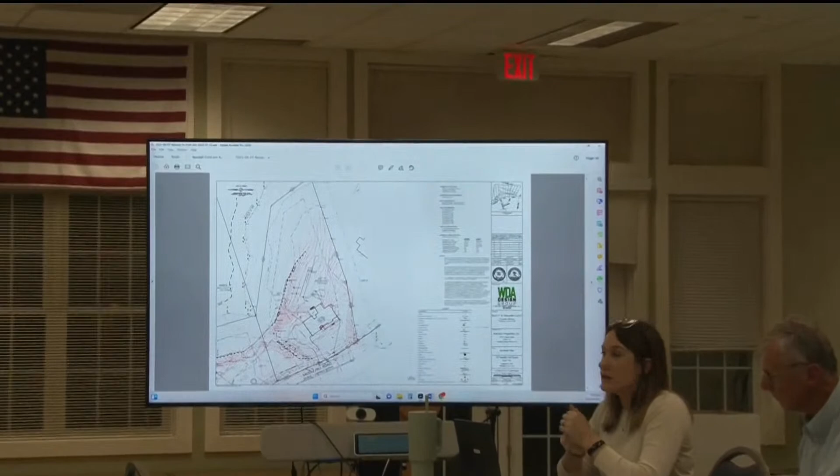So this was an order of conditions for a single-family home. It was constructed in conjunction with the property next door, which was 22 Saddle Hill Road. The COC came before the commission, I think, first last year. Lucas reviewed it and had some comments that we worked through. So the only remaining comment here was this property and the property next door were permitted with natural wildflower meadow areas, and they were actually permitted with those meadow areas occurring in front of the PIB.

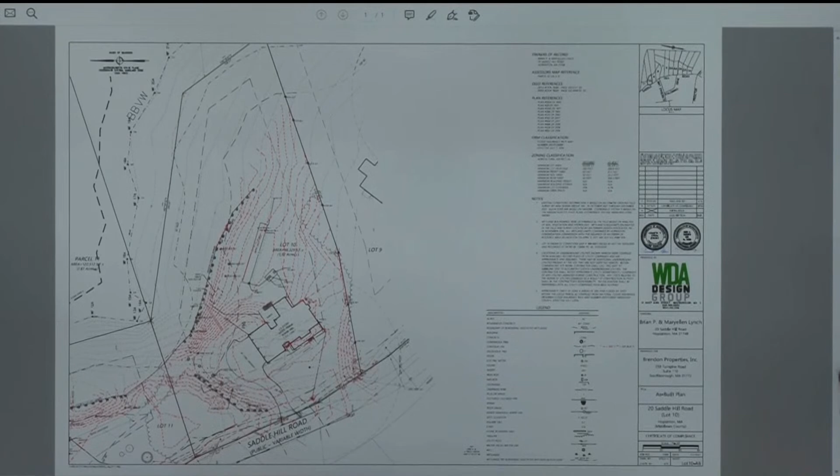The last time that Joe was out there, and then subsequently I was out there in the spring, I didn't feel that the meadow area had been established enough. It looked like perhaps the landowner had mowed at some point. So I went back out last week, I have some photos. The developer also did some plantings as well, some small plantings, some mint and some other wildflowers.

So this is one of the houses we had discussed before, where the wildflower area is shown with a pheno rod. So here's the main wildflower area that we're looking at. You can see it's a little bit more grown in. And here are some of the plantings.

Yep, so it is the best it's ever looked. Is it perfect? No. It does have some plantings, and it's not being actively mowed. Again, as we had discussed on the other property, I think the commission—well, I personally wouldn't recommend to the commission to have the wildflower area in front of the PIBs again. I think there's kind of a lesson learned here, but in terms of compliance for this house, I think that we've reached substantial compliance. And we have had that educational component with the homeowner as well, so hopefully we can get continued compliance.

So your recommendation is to close, or to issue the certificate of compliance, Kim? My recommendation would be to issue the certificate at this point. All right, and then not to use phenol rods going forward on other properties too, right? I would say any area that the commission intends to preserve in any way in perpetuity should be located behind a PIB.

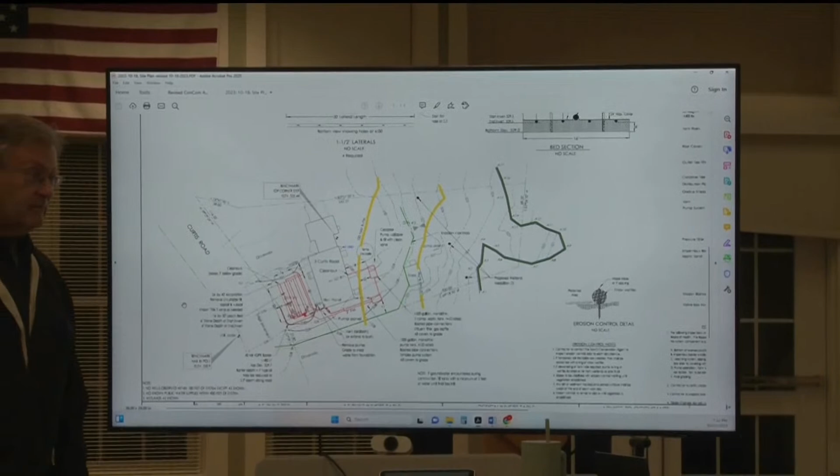Yeah, I can go through those quickly. As was noted, we had looked at the delineation and found it to be appropriate. Had noted there was a discrepancy in the flag numbers - I think that was just a typo.

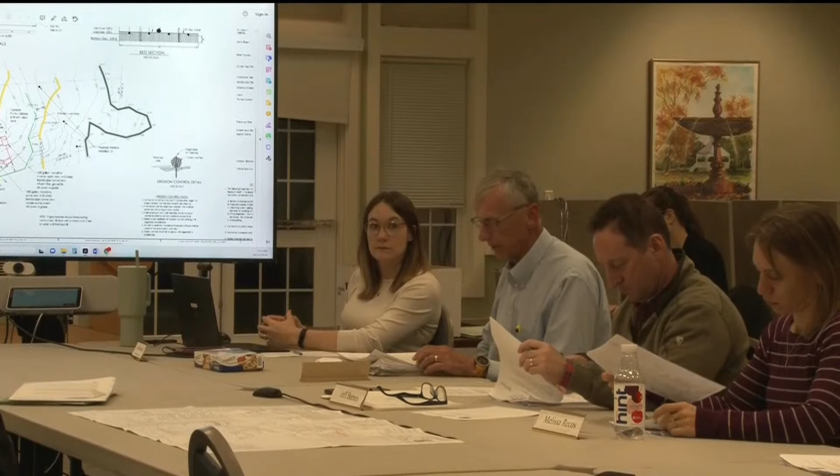There was also an existing drain pipe on the plan labeled as sump drain. We had asked for some additional information on that - apparently that is a drain from a sump in the basement to carry groundwater from the basement.

BVW forms were appropriately filled out. The PIB extra location was noted. We also had a comment recommending some additional erosion control, specific to keeping soil out of the road. The applicant has extended the erosion control barrier along the property line, but would note that maybe something should be done along the road to keep any erosion from coming out into the road.

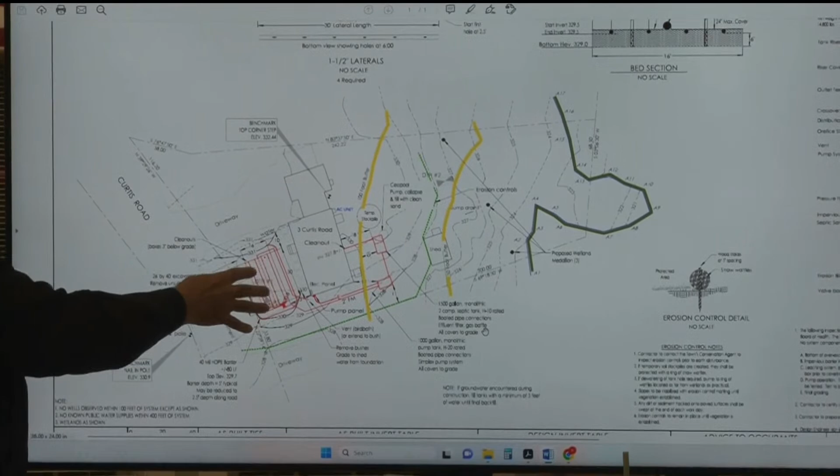Yeah, we did extend it out into the right of way up to the edge of pavement. This is the road pavement, this is access for construction right through here. The topography tends to head down this way, so there's a little room for it to come out this way. During the bulk of construction, this is going to be a big hole anyway, so any sediment is going to go into the hole and not outside. I'm not sure what else we can really do there.

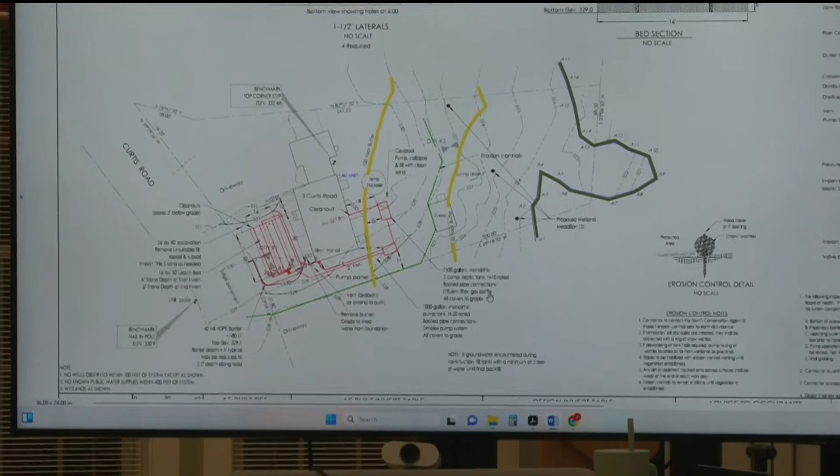We did the one across the street a few months ago and didn't have any issues, if that helps. Is there a catch basin anywhere here? No. There's a drain pipe over here - there's a wetland with a drain pipe coming out of it that runs through a couple of these lots and then out into the street, but we couldn't find any storm drains.

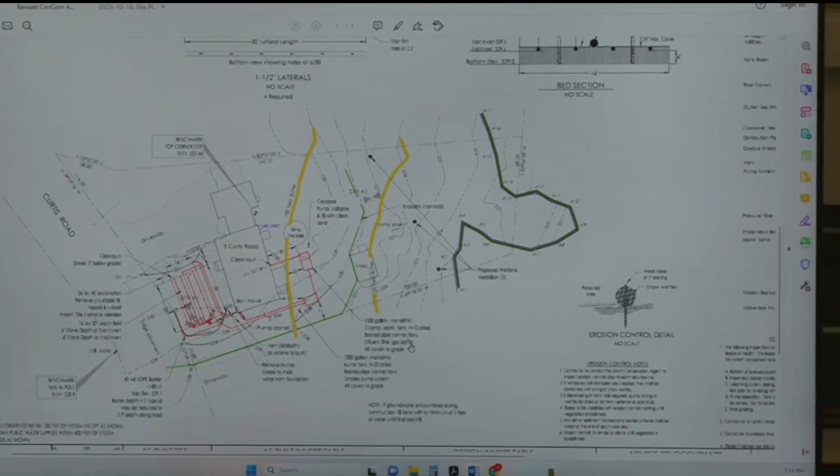Okay, and all the work is on existing, pre-developed, currently developed area, correct? Yes, and we think by moving the system to the front yard, out of the wetland buffer, is a significant improvement. Yep, absolutely. And the shed - it looks like the corner of that is in the buffer zone, but that's lawn area right there? That's all lawn. Okay, yep.

Questions, comments from the commission? I think it's pretty straightforward. Questions, comments from the audience? Okay.

If I can get a motion to close and approve the request for determination of applicability for 3 Curtis Road - so issue a negative determination of applicability. So moved. And a second? Second. All in favor? Aye. Opposed?

Okay, so can I offer you a cookie? I'll take it, through the chair.

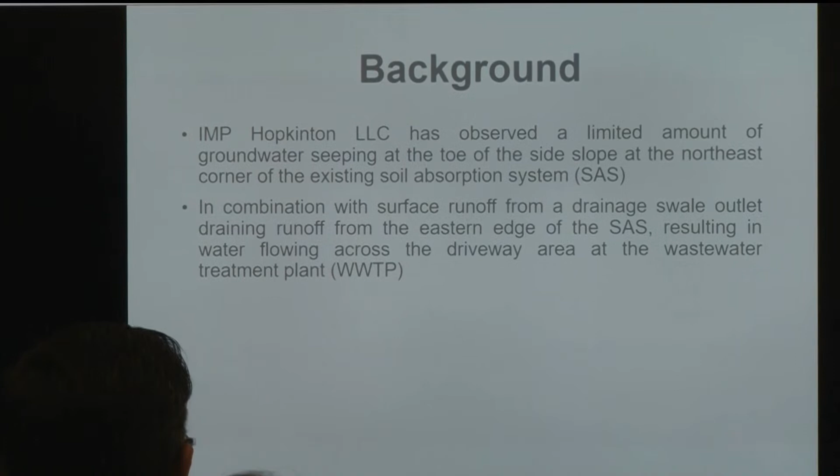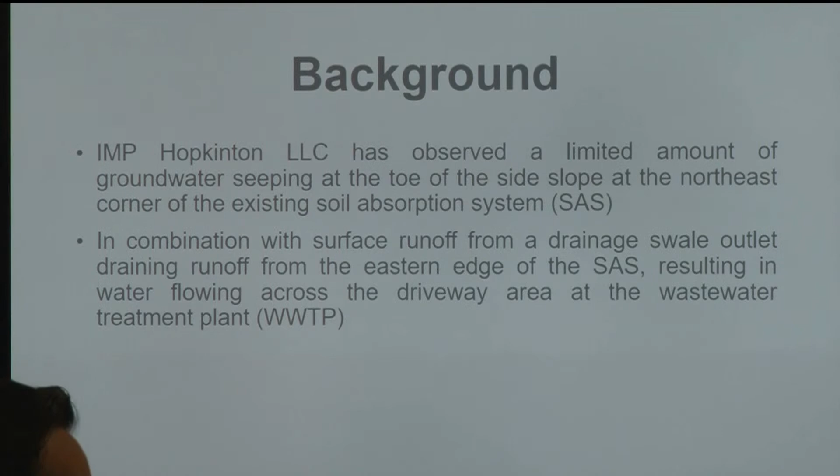Again, my name is Frank Occhipinti. I have with me Jordan and Don - I'm Don, Provencher Engineering. So the background of the project, for the most part, it's an existing wastewater treatment system, and it has a soil absorption system that is currently failing. This project is to basically improve or repair that failing system, which includes adding a geomembrane barrier in order to prevent the breakout of the current system.

We can just go continuing there. So this is essentially the proposed plan in order to install approximately 100 feet of that geomembrane. This plan has been reviewed and approved by Mass DEP, and all of the work is outside of the resource areas, yet inside the buffer areas.

We did look at the review comments from Lucas, and some of the key items was extending the erosion control up at the upper right corner, so that's not a problem - we can extend that in order to prevent any runoff from the driveway, I think was one of the main concerns. The other one of substantial concern was just providing a checklist submittal and the updated wetland flag, which I think we provided to you earlier today, so those have been provided.

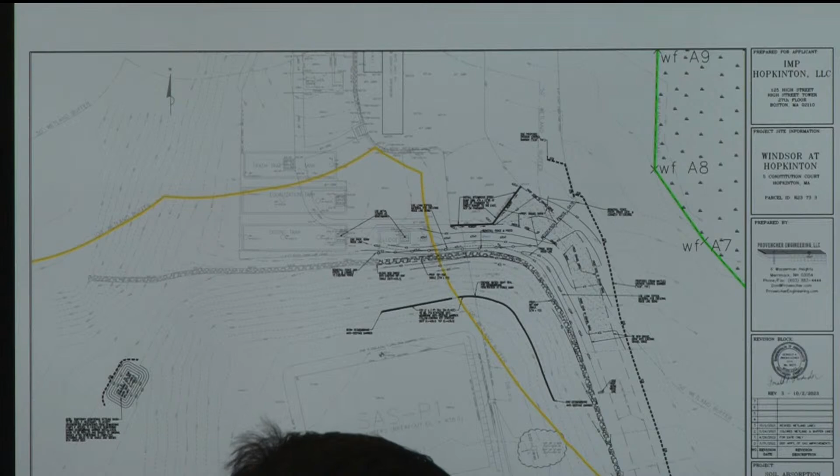And then lastly, I think the only other comment was, again, I think it references back to the... I guess the question was, does it actually qualify as a minor project exemption? Joe, you can elaborate on that?

Yeah, it would. Essentially, while the work is proposed in the previously developed area, it's technically not quote-unquote lawn, but it is developed. So as written in the bylaw regulations, the exemption is for work in an existing lawn. So that was something for the commission to discuss based on...

Yeah, my sense is, in talking with Kim, that it shouldn't qualify for that reason. It sets a precedent, but I don't think that's going to have any material implications related to the project. I think it can still get approved as an RDA, but I'll open it up to the other commission members for comments, questions.

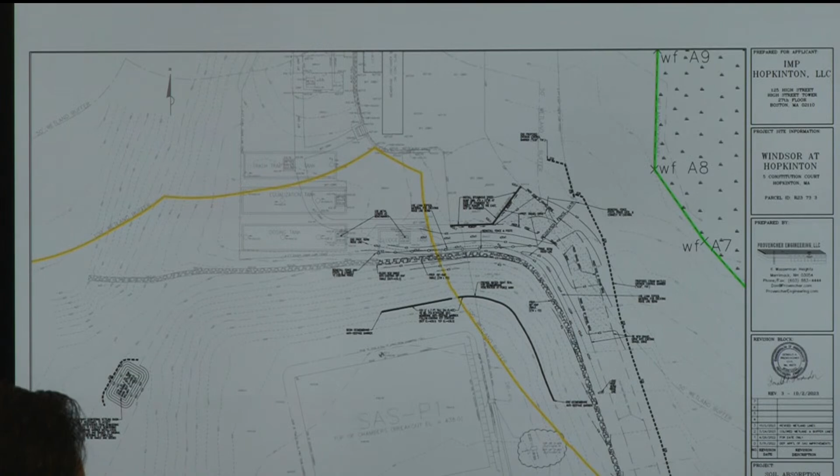I would just add that typically when I issue exemptions administratively, the work scope is limited to a deck, an above-ground pool, a shed. So that's why I recommended the RDA in this case, because the work is about 500 square feet within the 50, and the scope of the work involves excavation. So that was kind of my reasoning.

What was the cause of the failure? It's only been in the ground for a couple of years, right? Yeah, so when this was permitted with the DEP, probably 5 years ago, I can't remember exactly, but there are 6 leach fields there. It shows like SAS-P1. There are 5 more of that same size going down the page. Right, in the back of the property, right? Right. Yeah. All the development is up front to the north.

One of the comments DEP wanted us to address was that there are reserve areas between the primary areas, the actual leach fields. I had submitted the plan with just excavating out the primary areas and leaving the reserve areas intact. They wanted us to excavate out all of the reserve areas and primary areas. So what we did is we basically removed all of the low conductivity, glacial till soils.

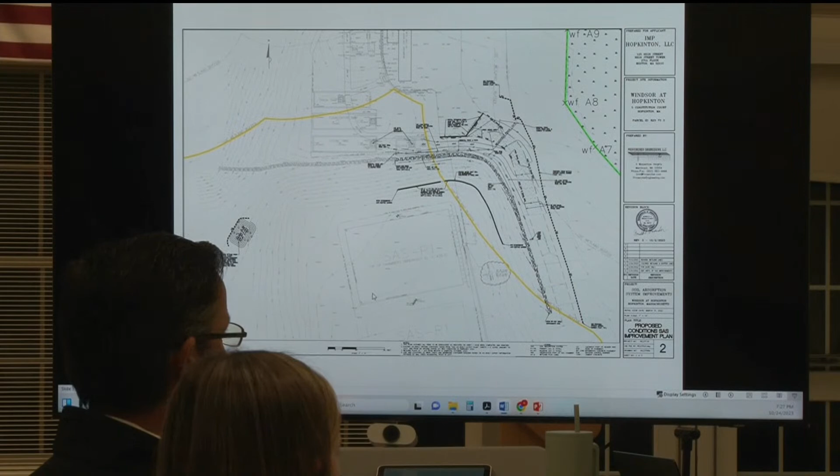Okay, so do you think the volume of the wastewater coming off the development is exacerbating the problem too, or do you think it was?

No, I mean, it was designed for around 50,000 gallons a day, and I don't believe they're approaching that limit. So it's not that they're generating more wastewater than they should be—they're within the design flow. There had been some spikes in the past, but from what I understand, there was a faulty flow meter that was misreading the amount of wastewater being generated here, and that meter's been replaced. Since that new meter went in, the numbers are a little more reasonable, so I think they're below that 80% threshold that DEP looks at for these groundwater discharge permits. If you start approaching 80% of your design flow, that's usually more than what's normal, and that's why they started asking us about it.

And I think it was found that it was a flow meter that was faulty, reporting that faulty information.

Kim, did you have any other questions? Joe? Commission members? Yeah, I have two questions, I guess.

The first is, how did you determine the limit of the barrier? It stops abruptly on that 437 contour, just at that corner. And the second part, in the discussions with DEP about this approval, you mentioned all the systems tie down to this location, and they asked you originally to put septic sand in the reserve areas as well, kind of creating one large system. Was there any discussion about putting a membrane between the systems to stop all the flow getting to this point? There was some discussion of that.

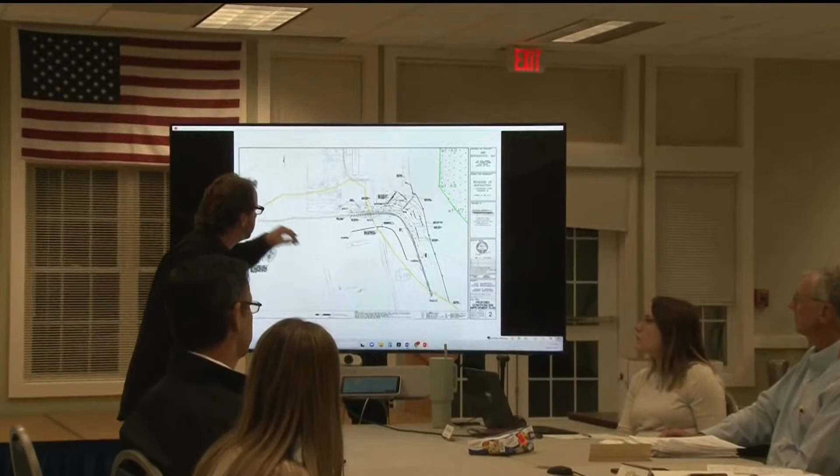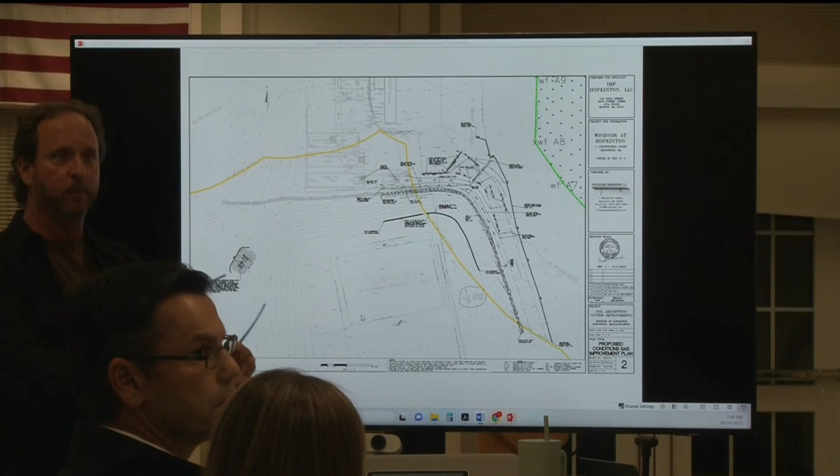The extent of the weeping is very small. It was literally where one of the lawnmowers that mow this area occasionally had made a rut, and it just started coming out of that one tire rut. So it's not along the whole slope, it's really limited to essentially one spot, and that was down at a lower elevation.

So looking at this elevation of 437, if you go 7 feet deep like we're proposing, the bottom would be at 430, which would be below the elevation of where the weeping was observed. So we're kind of cutting it off that way.

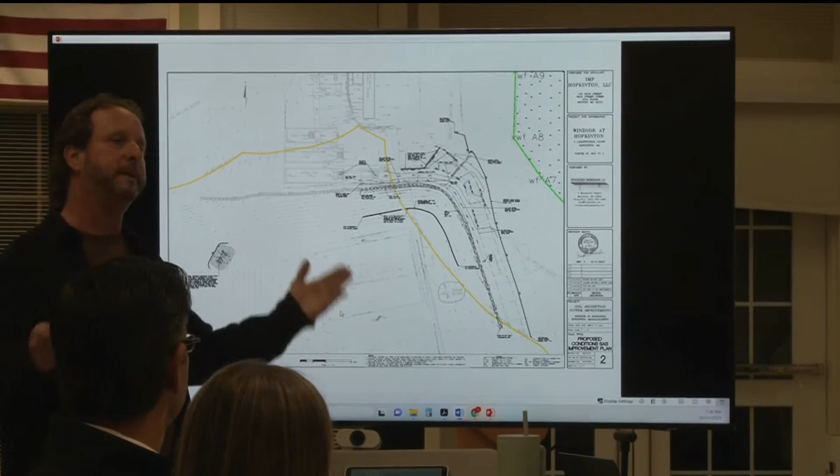The other thing is, if you know anything about leach fields, there's always a 5-foot over dig, so the Title V sand runs 5 feet beyond the limit of the leach field. I wanted to make sure we got it far enough out to be in the berm, because when this was all created there was ordinary fill on the site, low conductivity, mixed with subsoil, also very low conductivity. There was a dike built to contain all the Title V sand. I wanted to make sure we weren't excavating in the Title V sand, because we'd be dewatering that forever since it's so conductive. So we pushed it out further so the membrane would be installed in that low conductivity soil, where there shouldn't be as much seepage, since it's not like Title V sand.

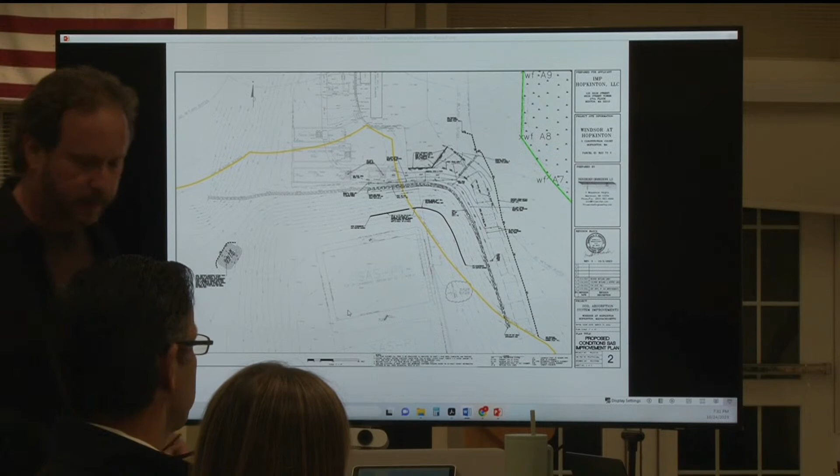Did I answer your second question? About DEP, the discussions with DEP, and whether there was putting a barrier between the systems to stop flow from getting to this location — we did discuss that. DEP didn't like that idea. They said if this didn't work, they like this idea better because you're focusing the fix where the problem is, and it's not posing any other problem besides that little area that's weeping out. They thought this would be the appropriate fix, and if it didn't work, they'd probably look at doing something else like that in the future. But at this point, we're confident, and they're confident, that this should handle the solution.

Yeah, the reason I asked is you've got that corner where the weeping occurs today. You put the barrier in — are there concerns that the weeping will just shift to the other side of the system, at the same elevation, coming out towards the wetland to the west?

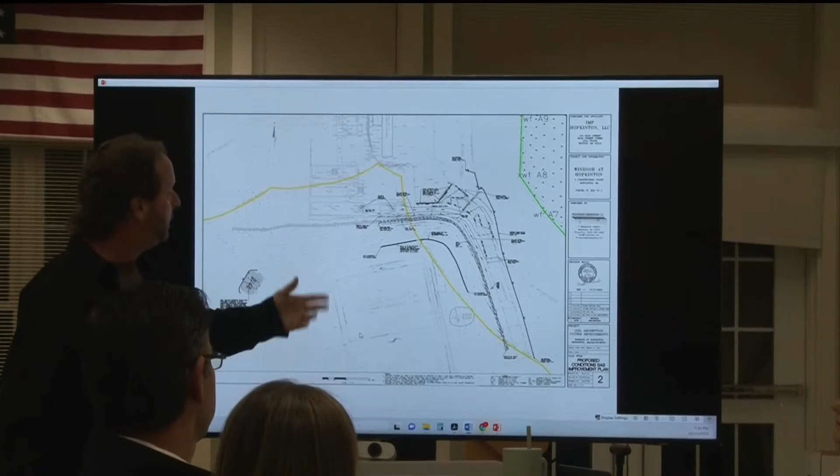Yeah, I don't think we're anticipating that. If we had to come back and do some other interim barrier, we will. I think what you're looking at here is that, other than this little segment, we would be outside of the buffer zone. If we had to come back and do something, if it weeped out here we could extend it here. This is a reserve area. If we did a barrier here, I'm not promising, but I would think it would pretty much be outside the buffer zone for any other fixes we're doing. And if it was in the buffer zone, we'd be right back here, obviously. But we're hoping that's not the case.

It was a very minor weep. I mean, they're putting out 35,000 gallons a day. If I had to guess how much seepage was coming out of that corner daily, if it's a couple hundred gallons I'd be surprised — I don't even think it's that, I think you're less than 100, even 50 gallons. It was literally just a very small weep of water coming through there. It was almost imperceptible, except for the fact that we went through several weeks — this wasn't this summer, obviously the summer before — of completely dry weather with no rain, and there was still some seepage coming out, so it became evident that it's effluent, not just runoff.

Okay, thank you. Any other questions from commission members? Questions from the audience?

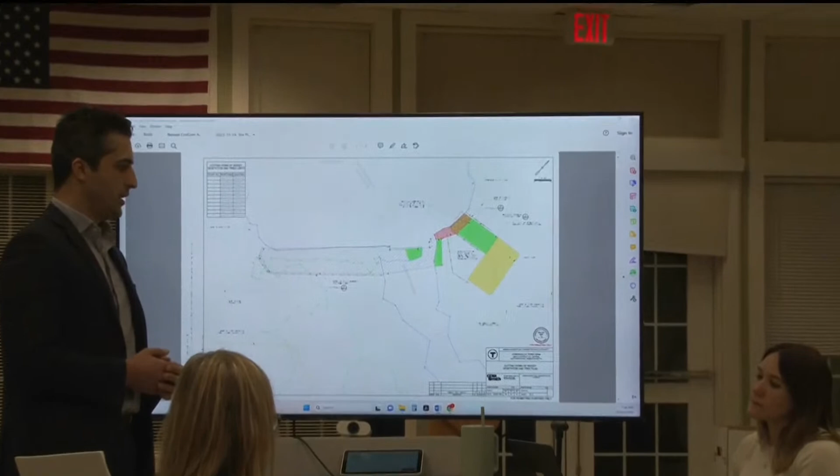So those are the main two items. I believe we provided some clarification. We can discuss here to answer any questions.

Okay, thank you. Joe, do you want to go through your comments? Sure, as noted.

We did meet on site to review the wetland line. There were a couple of areas I had pointed out in my first memo. One was wetland flags 1.7 and 1.8, which I thought were a bit low. We looked at those and moved 1.7 up to essentially the base of the dam, which I think accurately represents the edge of the wetland. I can't even read the flag numbers, but I believe it's right in that area. Correct, gotcha, okay.

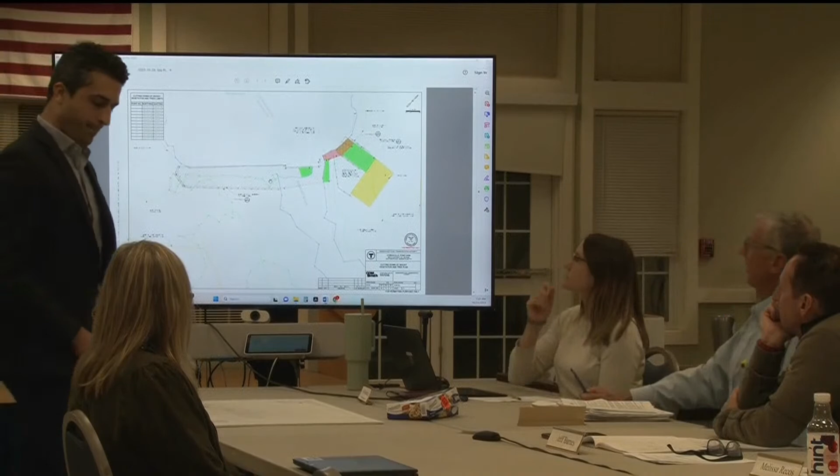I also noted that I had observed some hydric soil on top of the dam, on the more western end. We took a close look at that, and the extent of hydric soil up there was not significant enough and too inconsistent — there were a couple spots of hydric soil interspersed with upland soil. So we decided to leave the delineation on top of the dam as it was originally delineated.

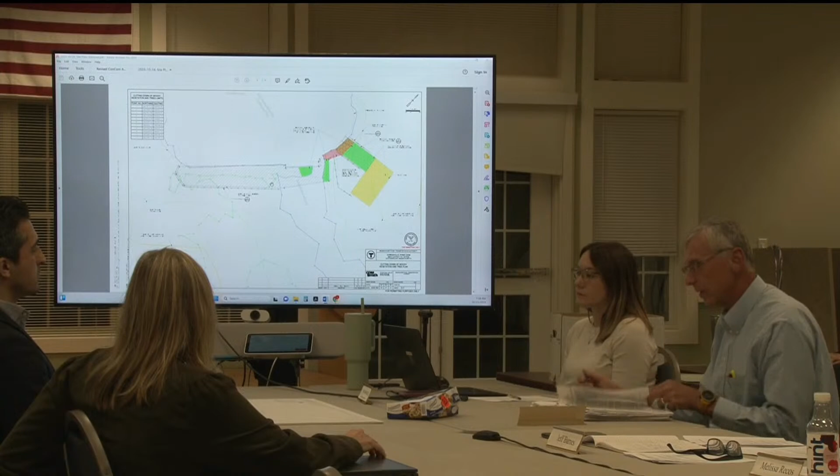I had a comment regarding invasive species. The applicant is discussing an invasive species management plan, similar to what was proposed for Southborough. So we can just put that in as a special condition? Yep, okay, that would be good.

I think you also agreed there was a lot less invasives. That's true — the invasives on the Hopkinton side are much less significant and dense than on the Southborough side. The Southborough side is around the parking lot, and there's a lot on that side, very dense. It's present on the Hopkinton side, but scattered and not as significant of an issue.

They addressed the comment on how the sediment-laden water would be filtered, if the commission needs to discuss again any proposed mitigation going forward. I think that covers all the comments — everything else was, I think, adequately addressed.

Okay, thank you, Joe. Kim, did you have the special condition that Southborough had put in their order? If you could read that for the other commission members.

The special condition from Southborough reads: mitigation for tree removal within a resource area shall be captured within a future notice of intent for work on the dam. Mitigation was stated to be in the form of invasive species control and removal. The future NOI is to be submitted within 24 months of the issuance of this order of conditions. If an NOI is not submitted within the specified time frame, then the mitigation shall be required as part of this order of conditions and contingent upon the issuance of a certificate of compliance. So that was what Southborough had included in their order, and the thought was that we could just carry that over to ours as well, to be consistent.

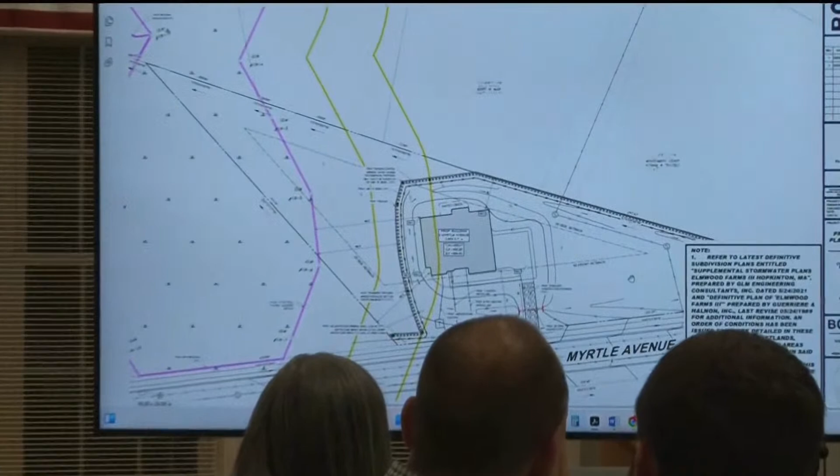So if Toll Brothers has bought this now, I just want to make sure they understand the order of conditions. Number 96 is that they'll put a drainage system in my backyard. It's pretty specific and laid out with diagrams how to do that. So just want to make sure you guys are aware of that.

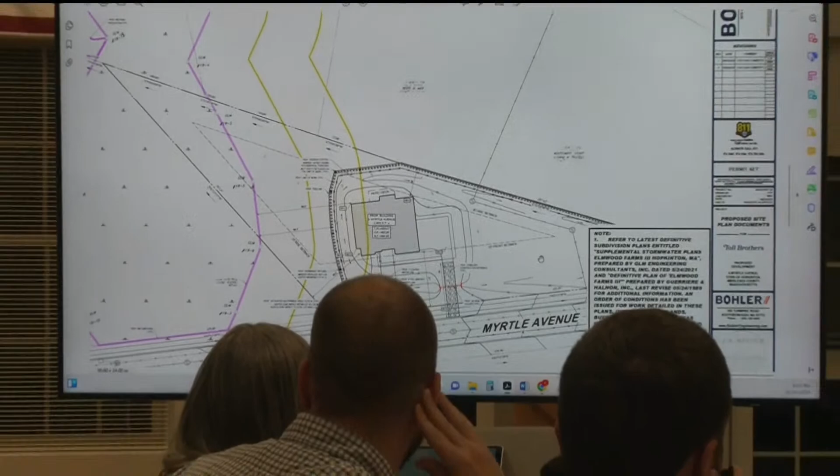Yep, we're aware. I also want to point out, we don't own these lots yet. We're still working with the seller to finalize, but we understand that will be part of what we do. And I think it's the first thing we have to do when we get out there.

Okay, if I can get a motion to close and approve the notice of intent for Myrtle Ave, which is lot 52. I'll make that motion, and to have Kim sign on behalf of the members present. A second, please? Second. All in favor? Aye. Opposed?

Okay, and if I can get a motion to close and approve Lot 54, Fitch Avenue. Jeff? Yep, I would just add to that motion our special condition contingent upon the planning board's approval of a stormwater management permit. Yes, yep.

Can I ask a question on that too? Yes. I'm assuming that what we will do is make the revision -- we're talking about Myrtle Ave? Not on Myrtle, we're doing Fitch now. Okay, so that special condition will be included in the vote for Fitch Avenue.

So that one was closed and approved. For Fitch Ave, what was your question? My question was, I'm assuming that we will change the triangle and add the super silt fence to the plan, and that will be the plan that's referenced? Yes. Perfect. Yep, so that way it'll be done because it's on the plan.

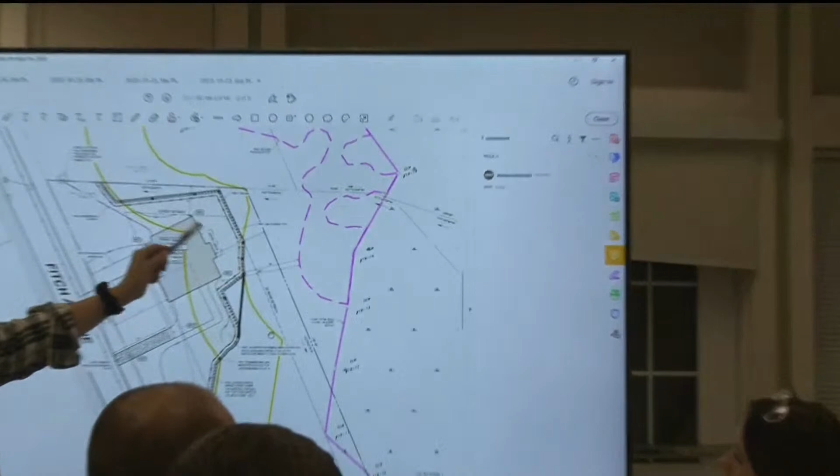So what we talked about was basically from here around, we could go to there. Yeah, I think that's okay. I just wanted to make sure that we could -- you're going to vote now, but we could submit a plan that showed that on the plan that would be referenced in the order. But yeah, I'm okay going to the beginning of the new draw line.

Yeah, that's fine. And also, Toll Brothers will be employing construction period best management practices which prevent a deluge of water from backing up against that silt fence. So it shouldn't be necessary anyway to have it be so challenged. We'd rather be safe than sorry. Yeah.

Okay, so is there a motion to close and issue the notice of intent with the special conditions noted and subject to a revised plan being submitted showing the alteration of the limit of work in the one corner, and to have Kim sign on behalf of the members present? So moved. And a second? Second. All in favor? Aye. Opposed? Okay, thanks guys, thank you, appreciate it.

If we can get a motion to continue the hearing for 11 Fitch Ave to the next meeting? Yes, please, Mr. Murphy. Okay. So moved. And a second? Second. All in favor? Aye. Opposed? Okay.

Ed. Ed and Matt. We did it. All right, a motion to adjourn the meeting?